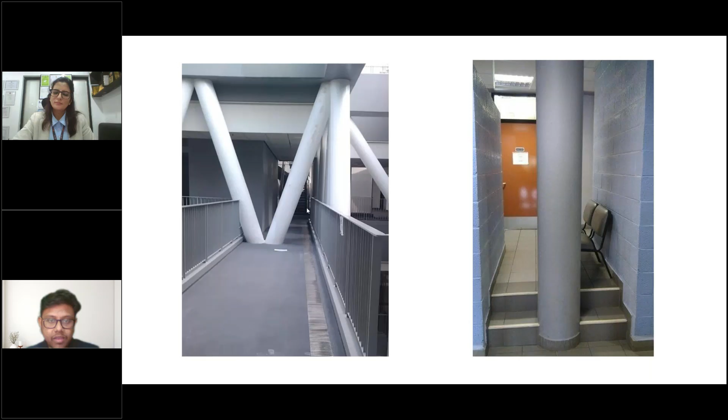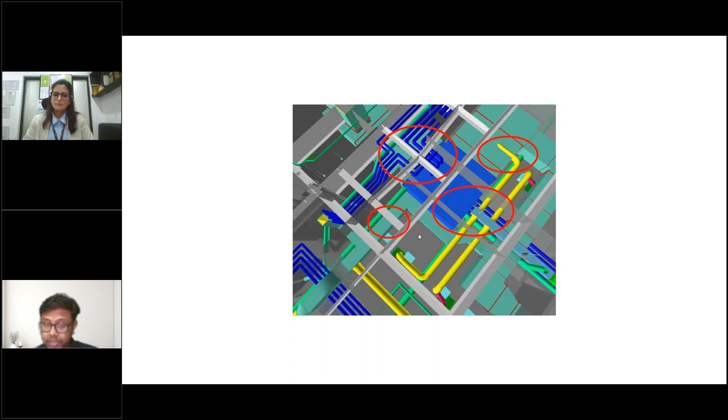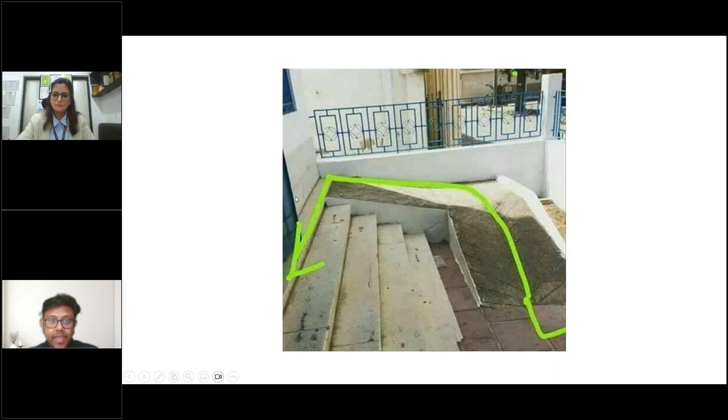So let's do an example. Wherever you're sitting, you can list some elements around you, let's say tiles, a fan, maybe the wall around you. You can see a lot of different elements around you.

Now here's the thing, when we are trying to construct a building, we need to document and keep that information in a certain place.

Let's give an example of a computer. Let's say a computer goes wrong, something happens to my system. What do I do? I have a manual. I can go and read that manual and fix it. I know these are the parts that need to be fixed, so I can go fix those particular things. Maybe the keyboard has gone wrong, I know that, so I can just fix a couple of keys and this and that.

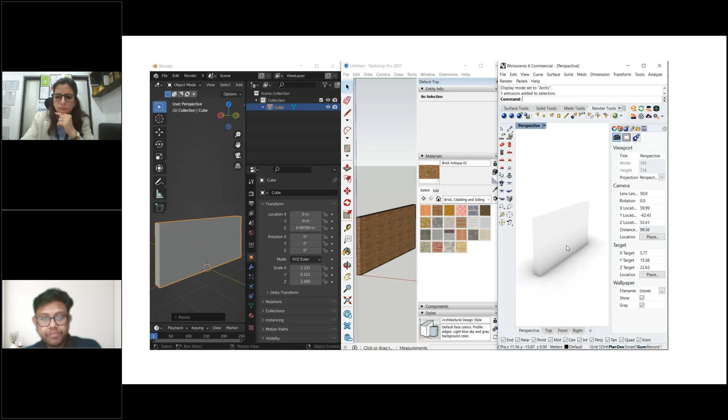And let's say something changes, so you change a wall. The information automatically adjusts accordingly, which actually saves a lot of time, and the schedules, everything is coordinated automatically. So you save time, you save resources, and we are helping everyone.

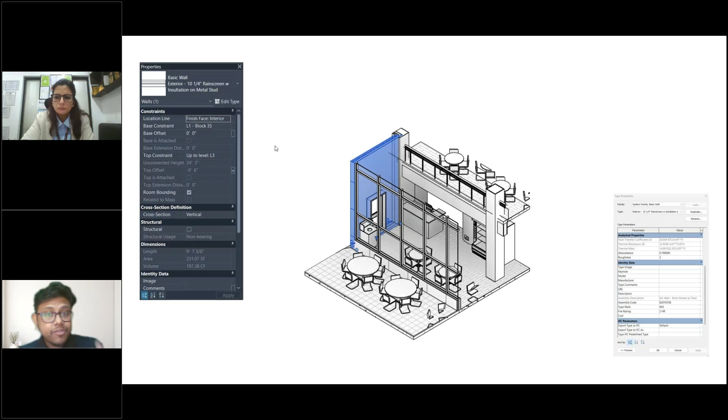Again, it's not just for walls. It could be for doors, it could be for any small element, even those glass mullions, the storefront mullions that you see. It's for everyone. All the information is embedded inside this particular tool. So what this BIM model actually does is help you contain the information. It's kind of a container, and you can add information, and then you can also extract information. That's the idea of this BIM model - you can add information and then extract information as per your requirement.

So this is one of the examples. Usually in previous stages we used to do 2D drafting, then model that separately. But there's no coordination. If something is already modeled, you have to go back and change it in the 3D, and that's difficult to track. If you change something in one place, you have to redo the rework in a different place, so tracking these things becomes a really big problem.

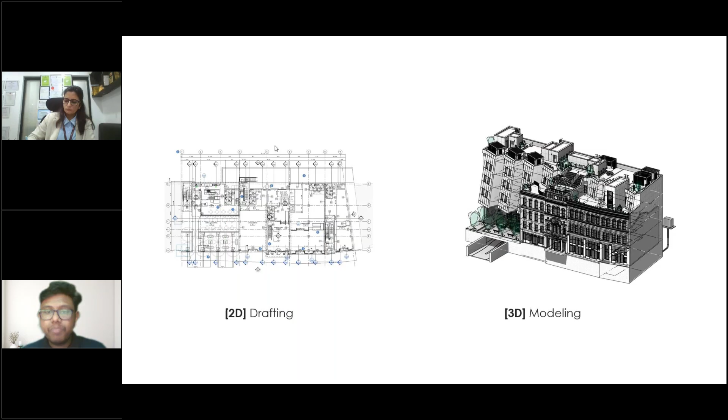But in BIM, everything is in a single place. You have the model, and you can extract information from it. Every piece of information is stored in a single area, and from that you can extract the required data. If someone wants to work on visualization, you can see visual data, or if someone wants a window schedule, you can extract schedules from this same model, and whatever changes you make get reflected automatically in the schedule. Plans, sections, and every detail required in building construction are all coordinated.

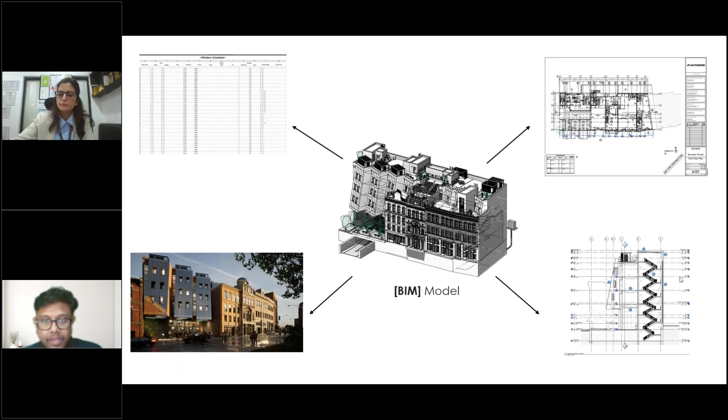And the best part about BIM is teamwork. Architecture is a domain where you work with thousands of people continuously, so it's important to have a platform and understand how teamwork actually helps. In BIM you have an environment where you can link different models into the same place and work in the same collaborative tool, and it's not just in one office.

Let's say you're working with different offices. We have different models, and we can sync them in the central model system, so you can access everyone's work. For example, there's a structural team, an MEP team, and an architectural team, all working together, and everyone can work on a single platform. So issues like coordination get really reduced at this stage.

Then there are different levels of BIM. People usually start with very basic drawings, like 2D drawings, then move to 3D, and then collaborate in 3D in real time. You also have full integration, like what we do in bigger buildings, where you have sustainable data, 4D simulation, and everything happening continuously in real time.

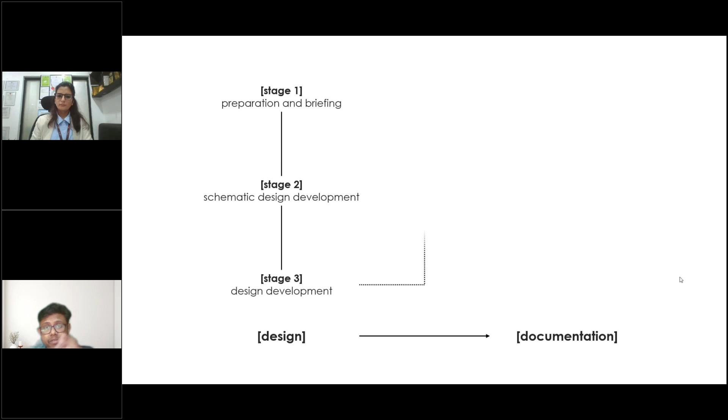We talk to clients regarding the briefing and understand the brief. Then we have design phases, which can be in different parts - we have schematic, design development, and construction documents. Then it finally gets constructed in stage 5, and finally we hand over all the data to our clients.

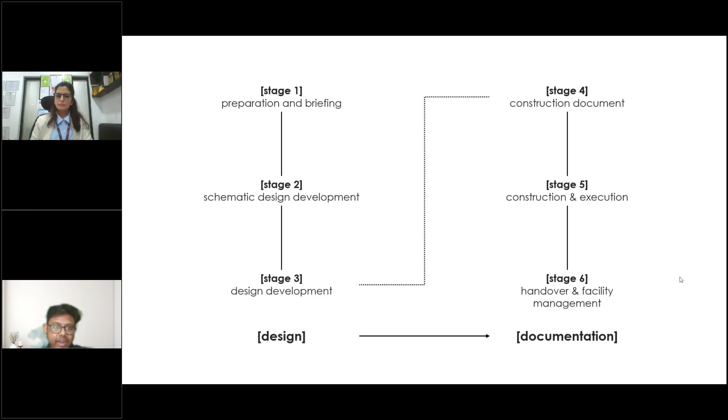So let's try to understand. Let's say you are a client with a requirement - you want a hotel, or let's say a hospital. When making a hospital, there are a lot of people and vendors involved, and a lot of stakeholders who are part of this agreement. It's our responsibility as architects to keep track of everyone working, and to give a proper set of roles and responsibilities to all these domains. This stage of BIM encapsulates all of this information, so everyone knows their job and no one is working less or more.

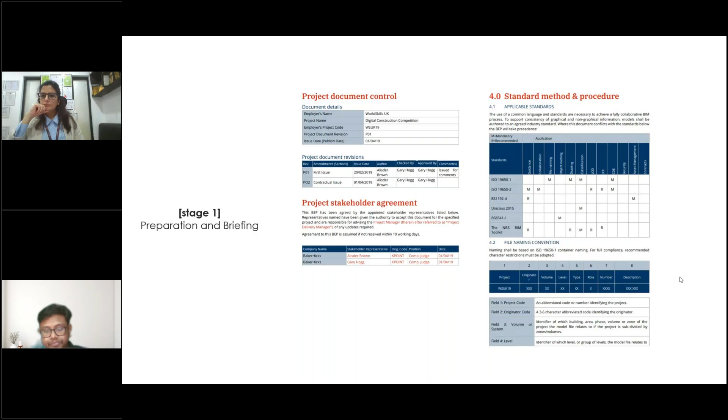Then comes design development. You see beautiful renders on buildings, and in apartments you see posters and things like that - that's what we talk about as visualization. As architects, we develop a lot of drawings and designs, render those things, and talk to clients asking if they like the design, or if there are changes they want. This stage encapsulates the elements where we have full liberty to design per the client's requirement, the surroundings, and aesthetics, and finally come up with a render. But that's something for the clients.

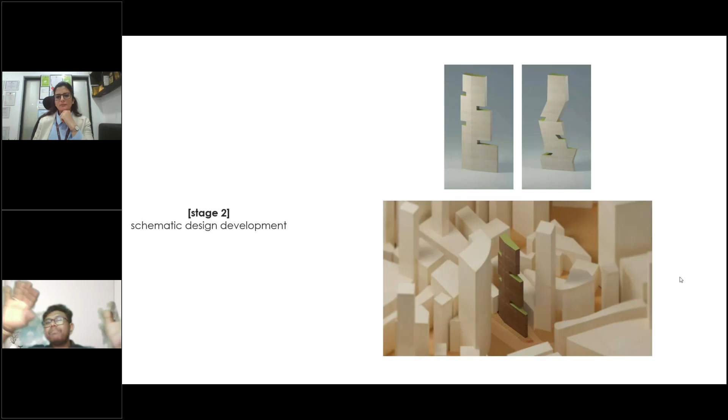But for developers, for those actually building this thing, we need drawings, and we need detailed drawings. So in this next stage, as architects, we further make the drawings in a more detailed fashion. We understand spaces - they need an office room, a toilet, a staircase, and so on - and how much area do we allocate for each.

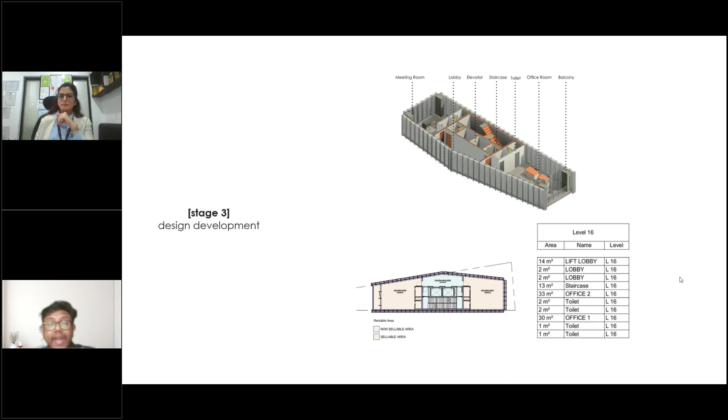So we are now addressing the bigger picture. We have broken them down into different levels, and now we are addressing each and every floor, and we are also segregating spaces, giving a more detailed design.

Then comes drawings. We can generate different types of drawings just from the same information that we had.

Usually in design, when we are working mid phase, the client will come and say, you know what, we do not like this thing, we want some changes. In usual practice, people would have to make every single change manually, be it 3D, 2D, or coordinating with the HVAC or structural people. That becomes tedious and time consuming, and it delays the project.

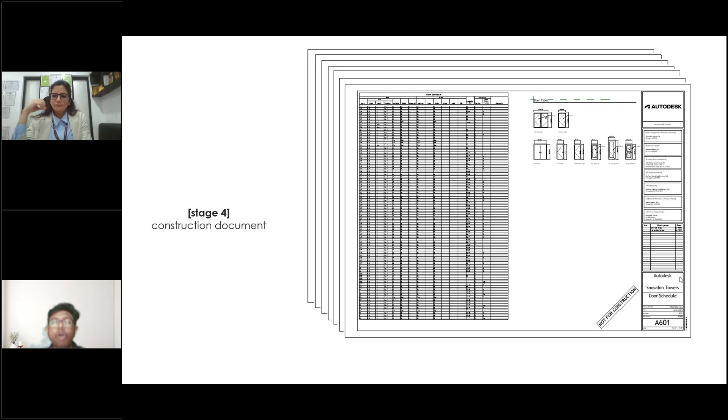But in BIM, since everything is collaborated, whatever changes you do in one area gets reflected in all the domains. So you don't have to worry about client changes, whatever changes are there, it's reflecting automatically in all the drawings.

So finally, when we are constructing, you might want to build a wall which is 10 feet wide, but inside we don't have 10 feet wide space, it's a 9 feet area that can be built. You don't have 10 feet length. So how do you communicate these kinds of problems?

And it's just one instance. There are billions of instances happening at every single second. So how do you keep track of all this information? BIM allows us to have a platform in which we can keep track of all of this information.

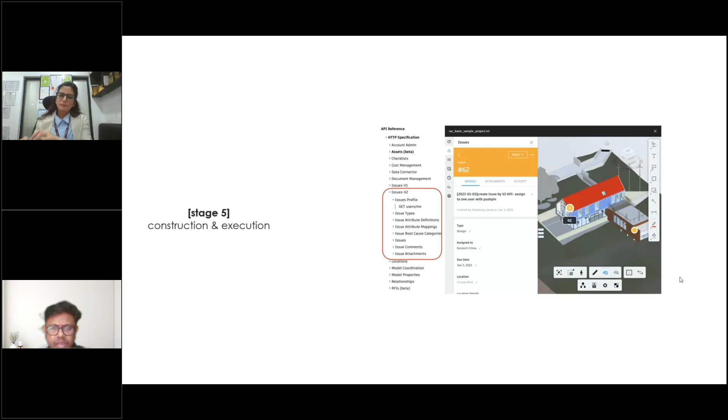This was something about addressing all the different stakeholders and their problems. We can go to a single place and see, okay, these are the problems, and everyone knows. It's not like we have to address everyone individually, everyone knows where the problem is, and then we can take care of whatever things are there.

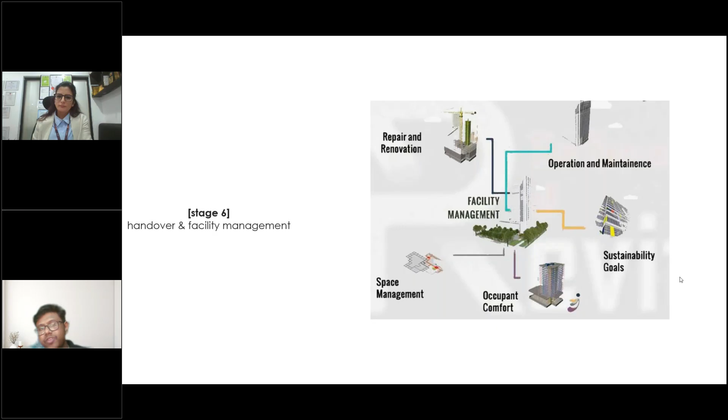And lastly, facility management, which is managing all the elements. There's a new technology in BIM, a very interesting part, called scan to BIM.

Now let's say you want to get your house renovated. It was built maybe 35, 40 years back, and you don't have BIM, you never had BIM at that time, but you want to make sure that whatever you're working on now is all coordinated properly and has the required information.

Usually what we used to do is manually go on site and measure every wall and every room and everything we can see, windows, doors, everything. But when you have manual, human input, that would always lead to errors, and errors would lead to further wrong documentation and things like that.

Whatever problems are there, everything gets captured in this scan, and that can be captured inside a software called Revit. So we can capture all the point cloud, put it in Revit, and then draw over it. It becomes very fast to see all the information. You don't have to go into the building, click photos and things like that. Every detailed information is there present with you.

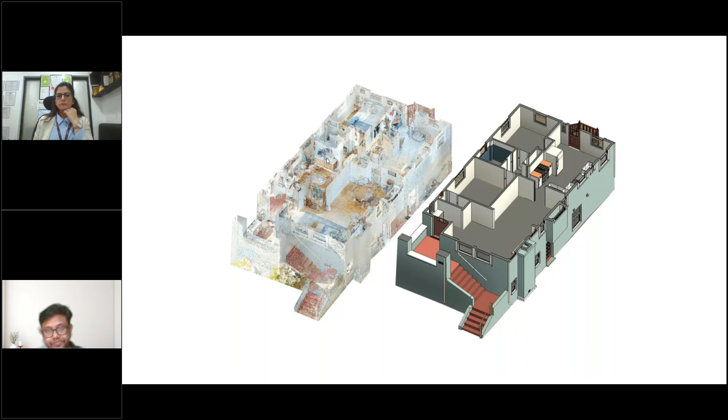So there's another example of a building. There could be not just small houses, but even bigger buildings. So when you have big facades and things like that, how do you capture these things?

A lot of times I see historians, people working with old monuments and restorations, often struggle with maintaining the actual geometry that was built. We can sketch, we can make dimensions, but that's not accurate, and there could be thousands of things happening. How do you keep track of everything and do it faster? What scan to BIM does is give us all the point clouds of all the areas.

Point cloud, as the name suggests, consists of thousands of points. The laser we use focuses on the building and captures data wherever it hits. So we get data of all the points it hits, and all those points we capture and call it a cloud, hence point cloud. We capture this point cloud in Revit, and that's how we build around it. It's a very fast and convenient way of capturing as-built drawings.

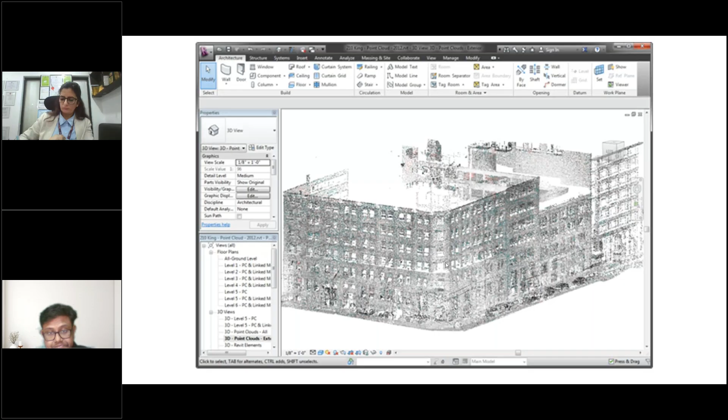It's again a little complicated thing, something we do when working in models. In BIM, it's a terminology where people can work on different levels and different details. So as you progress and become more mature, you can model different LODs. That's about LOD.

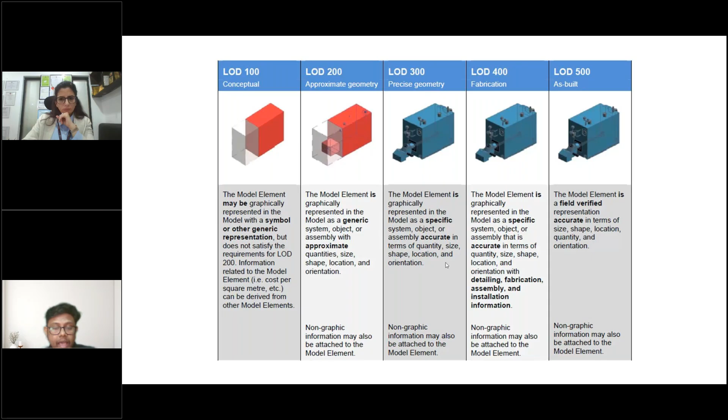Now we'll talk about a couple of popular tools, like Revit, ArchiCAD, and Rhino. Today we are mostly into AI, and AI and automation has become a very powerful tool. There's a tool called Grasshopper that can capture parametric designs, which we can compute using ChatGPT. ChatGPT can have data that goes inside Grasshopper, and from that we can generate geometries which go into BIM. It's a line of software that we use, and everything is linked to each other. We can then use Enscape or Twinmotion to see the beautiful renders or big posters that you see. So these are some of the tools that we use.